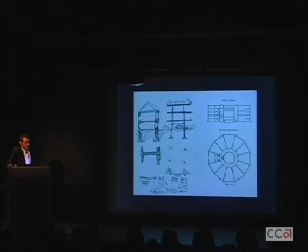But the theory that I would like to propose, and that later on I will illustrate extensively with the projects of the office, is that if in the past the architects who were addressing some sort of political projects were relying primarily on the section and the plan as the architectural devices that establish contiguities, adjacencies, hierarchies, and so on in the society that the building is hosting, in the near future the envelope is going to become even more important than these elements in terms of acting as a political agent.

Why is that? These are two images that represent a theory posed already, I think it was '89, by David Harvey, of what constitutes the culture of global capital or late capital, the infrastructure of global capital and late capital. He was very important at the beginning of our practice, because his theory was that late capitalism is enabled by what he calls mechanisms of spatial displacement, infrastructure, telecommunications, and mechanisms of temporal displacement, which is primarily credit.

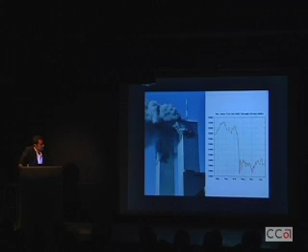And so this is the picture that we were working on almost as a generation 15 years ago. For example, Yokohama is very much a product of trying to embody that idea that we live in a borderless world, that we can move anywhere in that continuous space, and that reality is kind of liquid and fluid and dynamic. And what we see today is that the mechanisms of spatial displacement are used to bomb cities, and the mechanisms of temporal displacement have dramatically collapsed on a global level, with the effect that borders and limits are reappearing everywhere with an unusual virulence.

This is the American Embassy in London, for example. See what kind of borders buildings are required to have these days. There is increasing talk about protectionism everywhere in the world. So you can see that actually that idea, that utopia that maybe we grew up in, that reality was borderless and fluid and so on and so forth, is actually not so.

And what we probably have to face is that what we need to do is to re-engage in a reformulation of borders generally. So borders are no longer the borders that we used to know as borders, but they need to be redefined in an entirely different way. And that is basically one of the first reasons why I believe the building envelope is now a crucial element in terms of political agency.

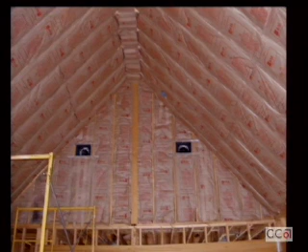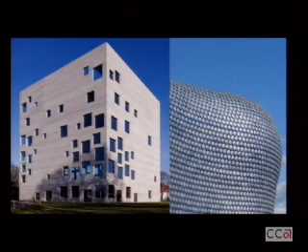Then there are other reasons why this element is important. Climate change. The building envelope regulates or can control basically 70–80% of the energy that a building consumes, and therefore it becomes a crucial decision in terms of how the building performs. The building envelope has also undergone in the last few decades a process of technical development that now makes the technology that builds roofs and the technology that builds walls very similar.

So where just a few decades ago you would use entirely different technologies for these two elements of the envelope, now you see that curtain wall technology or light metal cladding technology is increasingly used for the walls and the roofs, and so perhaps we need to start theorizing and rationalizing this element as a whole envelope rather than as a facade and a roof, or a facade and a silhouette, which is maybe the way in which it has been theorized in the past, and hopefully bring together the representational elements and the technical elements that regulate this homeostatic membrane between inside and outside of the buildings to make a more general theory of the building envelope.

So as a kind of structure of that theory, and I will be using this classification to categorize the projects from the office that I will show later, my proposal is that there are 4 basic types of building envelopes, and depending on each one of these types, which are basically aspect ratios between dimensions of the envelope, they enable, or they are more prone to engage on, certain types of concrete matters with political significance.

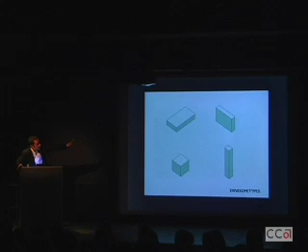And maybe I should say also the whole theory of the envelope is an attempt to escape from the research on the pure surface, on the pure treatment of the skin, and start to draw relationships between the constitution of that skin and the wider problem of shaping the envelope of the building. So some skins are more adequate for certain types of envelopes, and so on. And so there are these 4 types, which I call flat horizontal, flat vertical, spherical, and vertical.

So I'm now going to move quickly to explain each one of them, and the main possibilities that are predominant in each one of those types, using our own work as an example, because I think that perhaps they are not the best example of what we can do with these different types of enveloping structures today. I've discovered the subject by actually looking at the projects that were going on in the office, and I think as such they should be seen, not as examples of best practice in this future theory of the building envelope.

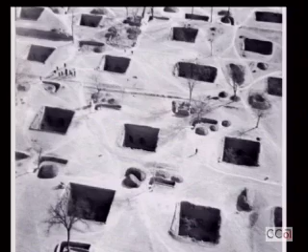So what is called flat horizontal, you all know what kind of buildings they are. They have a long history in architecture. They are sometimes also treated as a kind of utopian dream. But what I think makes them interesting as possible political or socially transformational devices, as devices that we can use to transform reality, is that they usually cover a large surface with a constant section which usually hosts movement of goods and exchange in a certain location, and that is a type of activity that is obviously central to the formation of communities.

At the same time, these types of envelopes are usually so large that they require certain ways of bringing daylight in and bringing natural ventilation in, and they are so large that very often they swallow pieces of nature. It's not uncommon to see how people who design airports or shopping centers, which are some of the examples of these typologies, tend to replicate nature in a very picturesque way inside of those buildings.

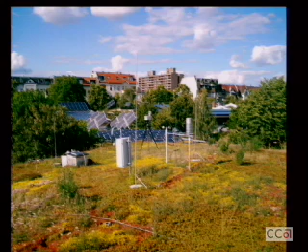So I think if these types of envelopes are first envelopes that probably contain important functions of social exchange and financial economical exchange in societies, they also have the function to articulate often the natural and the artificial, both on a representational level, but also on a very direct, pragmatic level, as I was explaining before, by allowing daylight and ventilation to be in or not inside of the building, by making a kind of sealed envelope or a transparent envelope.

And they also have, as you can see, a kind of increasing amount of green roofs growing everywhere. So these envelopes, I think, address perhaps another possible political subject, which is the ground. They can challenge or they can reconstitute the ground, because they are so large that if treated appropriately, they could probably act as a challenge to the natural ground.

The other feature of this type of envelope occurs on the peripheral surface. These buildings are usually focused on the inside of the building, and there is very little function environmentally, because the edge of the building compared to the total amount of surface is very small, so you can basically have anything there, even not insulated, and you will not substantially affect the performance of the building. But there is also not a lot of relationship between the inside and the outside.

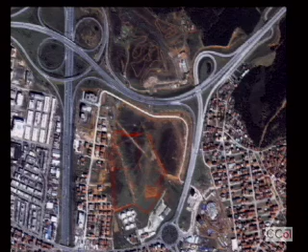So two projects that address these two surfaces, the top surface and the edge surface. This one we concluded a few years ago in Istanbul, on the Asian side, in this place in the middle of a highway interchange, and right next to this, which is basically the paradigm of the flat horizontal envelope: a blank box, sealed, not transparent to the outside, detaching the consumers from the non-consumers, detaching the inside from the outside, detaching the natural from the artificial.

So how all these different categories are treated by these types of envelopes are, I believe, quite profound political actions. So the approach that we took when doing this project was to challenge that type of envelope. One of the interesting things was that the earth was clay, was red, literally. Istanbul is a green and red city, so we thought that rather than using the blue and the yellow of IKEA, we were going to do the opposite. We were going to merge with the camouflage, with the palette of materials that is local to Istanbul.

We miraculously convinced the client to explode the box. There you see our building next to IKEA, to put the parking underground in order to lose that reference to the surface of asphalt that is customary in this type of development, and even to suggest the possibility that at some point the envelope breaks and maybe initiates surrounding fabric rather than remaining as a kind of isolated object in the urban field.

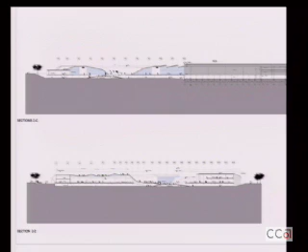So I'm not going to describe it in great detail. There are some of the first iterations of the project, where we were trying to activate also the roof, as I was saying before, as a device that will, as opposed to IKEA, bring daylight and natural ventilation inside of the spaces, but also as a device that can be used as a new park, as a new ground, and relates in different ways to the edges of the complex. So there you see the section of IKEA and the section of our building and what it does.

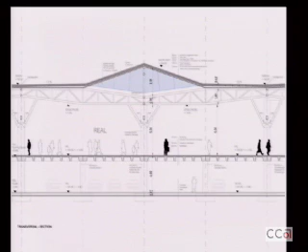I'm not going to explain the building. It's a very large building. Just to show you a few images of how the building is built with this very reductive palette of green and clay, and how the roofs become almost like a new park, and also how that new park challenges the definition of the horizontal, the ground. So by becoming closer to the ground, you are more able to challenge it as a cultural element. Not going to delve into any of these.

The issue of relating the natural and the artificial: the use of the skylights for natural ventilation and daylight inside of the building is also used as the device that generates the topography on top of the building, and this is how people use the areas on the building and the ground. I mean, these guys don't know it, but they are on unstable grounds.

Second project is a project that we are developing now in Birmingham, in the center of England, and this is a project that actually could be one of these non-profit projects that represent society, but the way it was given to us was absolutely perverse in the sense that the real project, which is the redevelopment of the station, is given to a corporate company that is doing it, and we are giving about 5% of the total budget to wrap the building and make it look good.

And also because it's a shopping center, it's a station and a shopping center, we cannot challenge the edge of the building. So again, we are in a situation in which there is nothing. I mean, the usual thing that envelopes used to exploit as a representative task, which was transparency, is impossible.

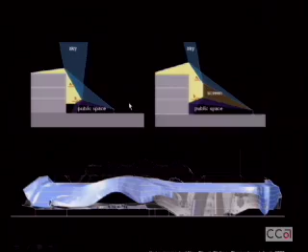So we produced this device, which rather than trying to make transparency, acts by reflecting the field, the urban field surrounding the building, and so we shape those reflective surfaces in such a way that they will always reflect the sky or the public space and not the buildings in front, because Birmingham is a really ugly city.

So we made a number of sections. You see the blue things are the halls where the trains are located, and you see that every one of these sections has different distances between where the public is located, because sometimes you are looking at the station from beyond the hall in front of the station. Sometimes you are next to it. And so these conditions of reflection change from one section to the next. Sometimes it becomes very complex. Sometimes it encloses or embeds the screens.

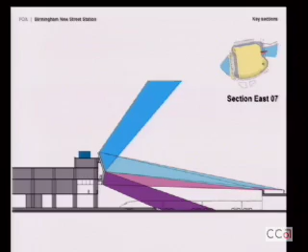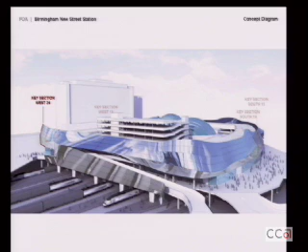So what we did was to define those few crucial sections, and by morphing them, we generate the skin that will represent, if you want, the building in the future. And so that is how that surface that reflects those elements will be generated and will perform in the future.

It's a kind of rain screen that is supposed to capture also the changes in light that occur in the center of Birmingham through the day, capturing the different solar conditions, but also artificial lighting, etc. So these are some of the images of this project as we imagine it will be. It is starting construction now.

And there is another animation here where you can see this idea of a kind of Koyaanisqatsi type of fresco, where you have the clouds reflecting and the trains moving and all these kinds of things inside. Unfortunately, you cannot see it, but you can imagine.

So the second category is the spherical category. Spherical doesn't mean necessarily spherical. It means that it is a category of envelope where the three dimensions are more or less similar. I call it spherical in honor of Sloterdijk, who is one of the people who inspired this research.

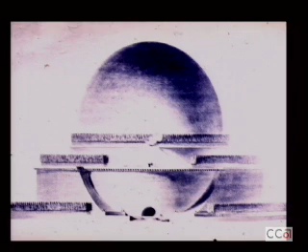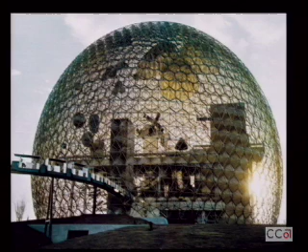So these are, for example, contemporary spherical buildings following my own theory. Sometimes they are not spherical geometrically at all, but you see that they have more or less the same dimensions in every direction. This is a typology that has been used often as a kind of ideal visionary typology, I think primarily because it doesn't really work unless you have massive air conditioning, because the relationship between the inside and outside is very tenuous.

And that's precisely what is interesting about this typology, and what possibly generates its potential in terms of representing or embedding a certain type of culture and possibly transforming it: this is the typology that, just in virtue of its geometrical qualities, has the lowest envelope ratio of all. If you divide the square meters of the envelope by the cubic meters contained inside, this typology is always lower than any of the other ones.

So what does this mean? It means that the skin is much more independent from what happens inside than in most other typologies, probably with the exception of the vertical side of the previous type, where that kind of relationship is very tenuous. But also, because of the nature of these envelopes, normally they are public buildings. They are buildings that have a variety of functions.

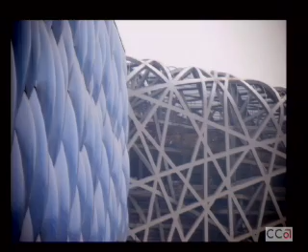It's a typology that enables architects a great deal of freedom in terms of surfacial experimentation. So you see architects delving into all kinds of experiments that have nothing to do with the functioning of the building, but primarily with communicating the organization to the outside. In many of these experiments architects are exploring tessellations or technologies that probably weren't affordable 20 years ago, like silk screening, layering the functions of the surface in entirely new ways, using CNC technology to produce these tessellations and so on.

So what you see in all these examples is some sort of latent desire of architects, and probably of the societies where they work, of producing organizations that are consistent and yet differentiated. My favorite case is the Olympic buildings in China. You can see that invariably, no matter which architect works, it ends up with the same recipe for the envelope, a pattern that has a differentiated nature.

And think what that means in terms of political message. We are still able to do big projects. We are still one, but as opposed to the Mao years, where there was the same suit for everybody, we are becoming sensitive to differences, to individuals, and so on.

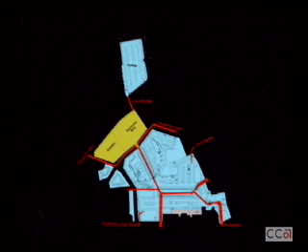We basically were given this plan. We were able to kink the surface a little bit, but not very much, because they already had outline planning permission, and we were told to simply make these two functions there. We did design the structure and everything, but it's irrelevant what happens. It's correctly done by the office, but the brief of the project is so constrained that there is not much you can do inside of there.

And in fact, this is another one of the reasons why I'm interested in envelopes, because I identified it as probably the last domain where architects have some power. In all the other areas, you get retail experts and cinema experts and housing experts and so on, and they know exactly what to do. So there are very limited possibilities of operating with the plan and the section as architects in the past did in order to transform reality, and we are now constrained to the skin.

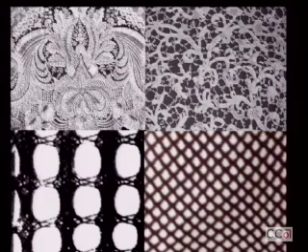So in this case, there is John Lewis, which is a kind of generic British department store, and an American cinema operator who have to occupy the building. But what we wanted to do was to relate the skin to some of the historical contents of the city of Leicester, as one of the important cities where there was textile industry in the 19th century. John Lewis is also a company that has a long tradition of hosiery and lace. So in a way, we turned that into the message that the skin was going to convey.

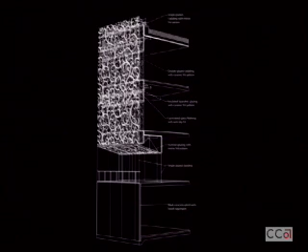And so we managed to convince the client to do this kind of very expensive skin. It's a cheap project, but in this case it turned out to be expensive: two layers of silkscreen glass with a drawing that was selected for its geometrical qualities of coverage, and later on you will see geometry out of the archives of John Lewis. And then we redrew it in order to make a number of tiles.

It is 8 tiles that by mirroring them would enable us to give consistency to the whole building, as opposed to what happens normally with these buildings, which are blank envelopes where the architects are usually forced to make a kind of collage, like you paint this blue and this gray and this yellow, and the whole thing looks a little bit like the scale of a city. Here it was almost the reverse of that. We turned everything into a single floating lace box.

And then we differentiated in order to provide areas of higher and lower transparency, both for the visual relationship between inside and outside, but also in terms of shading the envelope from the sun. So you see, the pattern is manipulated, and by this manipulation we can provide more or less density, and it is shaped to kind of embrace the heads of the people inside.

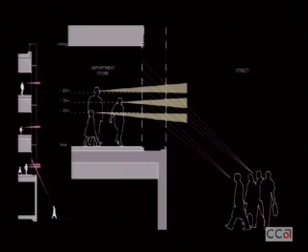And this looks silly, but it is not, because when you look from inside, you see through at the height of your head, because there is no overlap of the two patterns. But when you look from outside, the two patterns overlap, so the view is obstructed. This is how this facade works. So in a way, here the pattern challenges the unitized system of the facade with this silkscreen lace that can adjust to different densities.

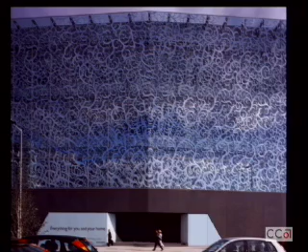And so these are some photographs of that envelope that, because it's mirror fit, sometimes picks up the neighbor, sometimes reflects the sky, sometimes becomes more opaque depending on whether the sun is hitting it or not, and at night produces these sorts of lace effects, as if it was a kind of Chinese lantern that changes color.

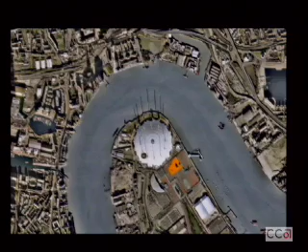Second project on this category of spherical is a project that is now under construction in Greenwich, in front of the dome, in that orange area, and it's a building that looks like this. It's a School of Design and Communication, and it's a building that is located in front of the dome, and it has to adjust to a kind of crescent-like urban regulations surrounding the dome, which we turn into kind of kinked, jagged form that works better with the function of the school to happen inside.

But I think what is interesting in terms of this discussion is that because of that position right in front of the dome, which is a massive blank object in the field, we started thinking from the very beginning in the possibility of doing something that almost doesn't look like a building. It looks also like some sort of container, and being the school part of the arts and crafts tradition, we thought that maybe a possible idea would be to use wallpaper as an envelope, kind of these floral wallpapers of William Morris.

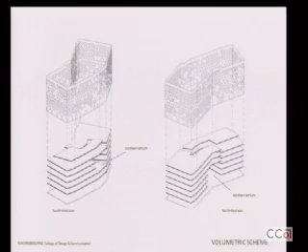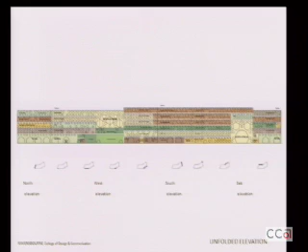And again, this latent desire of all contemporary architects of differentiating buildings. In this case, the pattern of fenestration is differentiated following the different functions inside of the building. This is an unfolding of the functions attached to the facade. So you see also that as a challenge to the conventional type of spherical envelope. In this case, what we are doing is to try to reconnect the inside and the outside, to use this membrane not as something that is a kind of free floating representation, but on the contrary is something deeper that relates to the programs and to other issues you will see later on.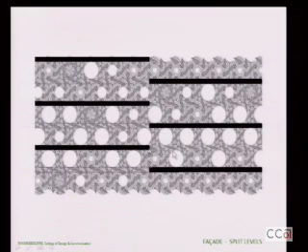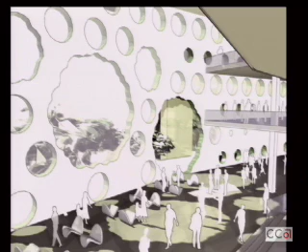So this is the system. It's a split level system that produces a double fenestration inside of the studios. It is very much like an architecture school, except there is not a lot of architecture, but similar things. So these two levels of windows are able to change in order to provide the flexibility of having different types of perforation of the envelope. You see, when the windows become larger, they become also corrugated. You will see later on why.

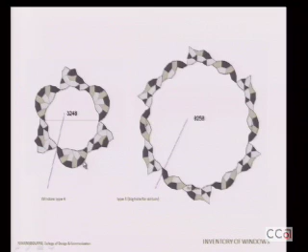Because of this. These are the floral tiles, the floral petals in the wallpaper, but instead of replicating nature, they are made with this non-periodic, non-regular tessellation invented by a British mathematician called Roger Penrose, that allows us to cover the field just by using these different tiles. And so you see how they produce the system of windows that make the building, and why, when this becomes larger, the edge of these roses becomes dictated by the tessellation system of the envelope.

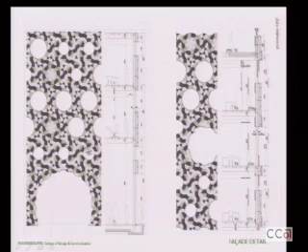And you see what they do in section, and what is interesting, I think, about the system is how it links the ornamental quality of the skin with the function, which is dictated basically by the size of the window and by the position of the section. You see the section always including two sets of windows, but when the window size changes, the pattern changes. So the pattern is different around here, and this occurs automatically when we color code every one of the tiles in respect to the polar center of this polar array, these roses around every one of the windows. So this is what happens. You see how the pattern changes as the window size changes. And this is a one-to-one mock-up to test the facade.

Next category. Are we already running late? Very late? We're okay? Okay, sort of okay. Okay, if it becomes really embarrassing, let me know.

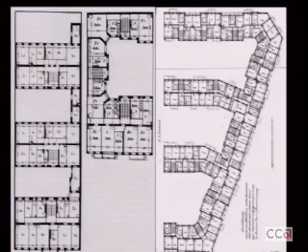So flat vertical typology is, you all know this type of buildings. They are buildings where there are two dimensions, one of them vertical, that are much larger than the other one. The city, basically after the Enlightenment, the fabric of the city is built with this typology, which replicates and optimizes depth of space for whatever functions are required, and the repetition of that and the configuration of that band of contained space is what forms the fabric of the city.

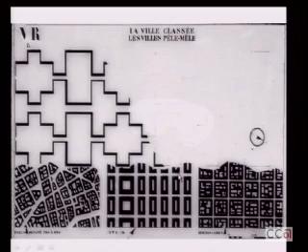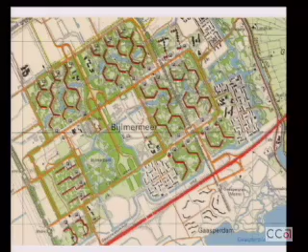You see the blocks suddenly have no front, no back. The public open space has occupied the whole ground of the city. I mean, some of these things in Bijlmermeer are doing the same thing, as opposed to those older examples of, for example, Barcelona or Turin, where the block is actually dividing the public space from the private open space.

So I think that this is, first of all, one of the most powerful things we can do when deploying this typology, which is to consider how it relates to the space of the city. But this typology also has another very interesting potential in terms of transforming the society that inhabits it, which is that, as opposed to what was happening in the previous typology, where the skin is basically independent,

in this typology, the figuration of the building and the environmental performance coincide or collide in that superficial envelope. So as opposed to the previous ones, here that is a very active skin that regulates the climatic exchanges, and at the same time it is also what makes the face of the community, and sometimes represents very directly what that face does, sometimes insisting on the independence between the cells of the individuals that compose the building, sometimes insisting on the industry, on the system that produces those envelopes.

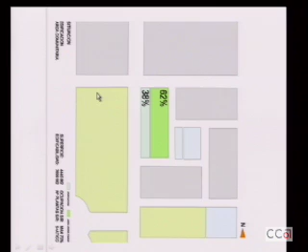This is very cheap social housing, where we were given a site and we decided to concentrate all the FAR on one side of the site, so that every unit will have a view of a private garden and a public garden on the other side that existed there. So in order to do that, and we had a height limit, we needed to resort to a very deep space, and that gave us the idea that maybe because we have a very low facade ratio, we can try to produce social housing made out of glass.

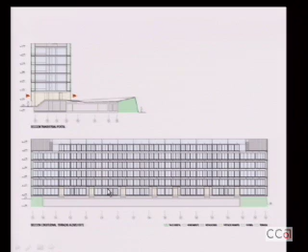But then realizing that we were in Madrid, and that the building is oriented north-south, so these are east and west facades, we needed to introduce some kind of solar shading device that then became that double skin, which produces terraces for every unit and acts as a kind of climatic buffer. You also see that the units have double aspect, so that enhances cross ventilation, etc. So these are the units. We are not going to look at them.

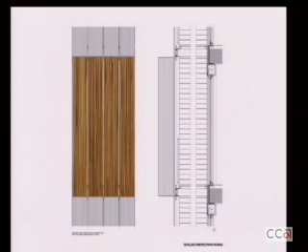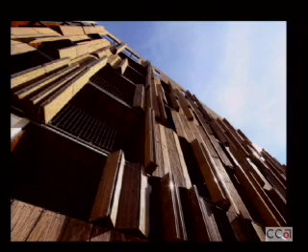In this case, everything is consistent, everything is regular, and yet the fact that people move the louvers differentially to accommodate their desires produces that changing and differentiated picture of collective desire on the facade that is not just a picture, is not just a collage, but is produced by actually having some kind of environmental performance. Well, these are simply these terraces wrapped in bamboo when they are open, when they are closed.

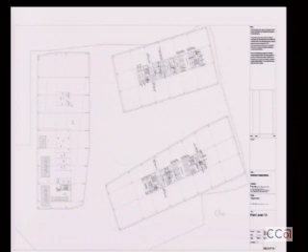So what is interesting about what we did here with the envelope, these are some of the plans. You see, it's relatively conventional inside. There is nothing we can do there. It's a commercial project. We cannot change it, but we can play with those deformations of the skin in order to produce the architectural expression of the project. But not more than that.

This architectural expression, because it's crystalline, had to be glass, but glass is now a material that is not quite sustainable. So we needed to think about some sort of solar shading device. So we asked, there is one slide missing, but we asked Arup to measure how the sun will hit the different faces of these faceted surfaces. And so they gave us areas that had more solar exposure because they were tilted, for example, towards the sky, and some areas that were to the north didn't really need much protection from solar exposure.

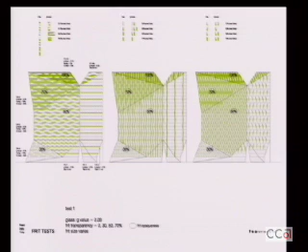So what we did was to devise, in this case, three systems of tiles that are fritted following a pattern, but there is only a discrete number of them that produce, again, that picture of differentiation, linking the expression of the building, the expression of differentiation in this case, which is this kind of political unconscious desire, with an environmental performance of the skin. And so those are those buildings, and this is how the skin would be patterned differentially by this system.

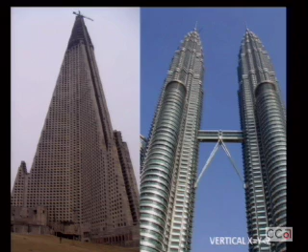Okay, last category, if I may, vertical. I think what is interesting about this category is that the friction between the environmental performances of the skin and the representation of the iconographic performance of the building is at the maximum. So these buildings have the most dominant presence in the urban skyline, but at the same time those skins are the most expensive, the ones that have to perform best because they are very exposed.

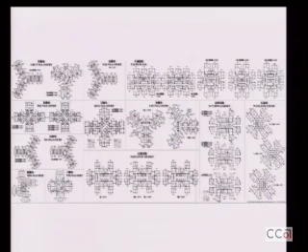So you see the complexity of folding the envelope in order to obtain certain facade ratios that, for example, allow for natural ventilation or daylight to every room in the building, as opposed to this, which is Dubai, where you see that nobody wants to connect to the outside. Nobody cares about natural ventilation. Nobody cares about daylight. Everything is artificial inside, and that's why the skin is suddenly much less articulated, because the relationship between outside and inside doesn't matter.

So this type of relationship is where I think maybe lies the most relevant research to be done with this typology in the future, which is how to move from the paradigmatic prototypical image of the tower to a vertical envelope that actually relates to all these climatic performances. The tower by nature is one of the building types that is most exposed to the sun and to the wind, and that also casts shadows on the surrounding field. So I think there are many arguments that we can use to produce a kind of anisotropic

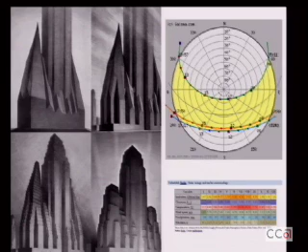typology of towers. This is some of the research that we've done in the office, where you can see that the facade ratios in the UK and the facade ratios in Malaysia or Hong Kong are substantially different. So again, that gives you an indication of the relationship between the skin and the space contained inside the building, and how that produces an entirely different expression of the building. Look at how these buildings work, and look at how these more Western type buildings work. I think there are cultural reasons for this differentiation.

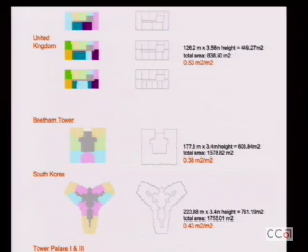Obviously, in Hong Kong, the climate is perhaps more humid, but I think that the main reason for these differences between some towers and other towers is cultural. In Southeast Asia, people living in high-rise buildings are still not accepting that they are living in an artificial environment, and so they shape them to obtain the same domestic environments that we can see in low-rise buildings. So, things that one can mobilize when playing with vertical envelopes. One of them is the structure.

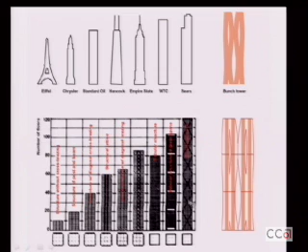This is a diagram from our proposal for Ground Zero for Max Protetch, which was a kind of utopian proposal where we were trying to propose the building as one more step in the evolution of high-rise typologies. So we shaped the envelope trying to mobilize this kind of diagonal nature of lateral forces in the building.

So, which basically produce also internal effects, but also related to other representational contents. I mean, all these images are also part of that idea of making the envelope representing certain, conveying certain messages. So you probably have seen that there is a kind of thread through all these examples in which the representational becomes reattached to the functional, as opposed to being more independent.

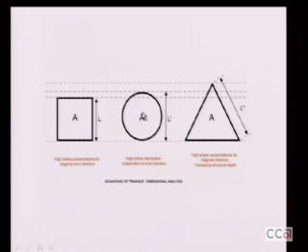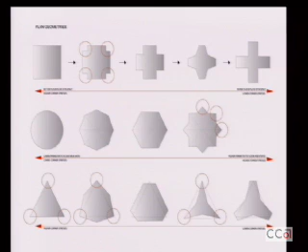So more research related to the structure has to do with how the envelope acts structurally, and the surprise of discovering that actually the mass of the building, the geometry of the footprint, has decisive effects in the performance. This is the same area, and this works much better than the other two, for example. This type of experiments is also some of the research that we are doing that relates to the vertical envelope.

This is part of the research that I've been developing in Princeton, and that relates to all these subjects. It is a proposal for an atlas of ideal footprints, high-rise footprints, and is something that we developed by looking at climate data and looking at solar exposure of different types of envelopes, and by using programs to play with different types of plans.

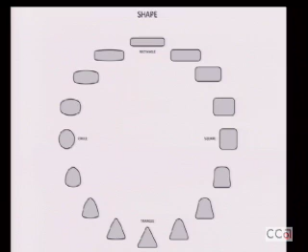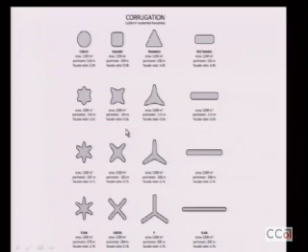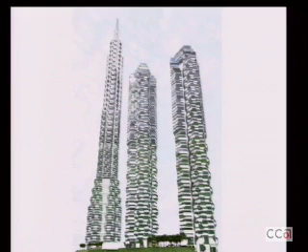It's a kind of megalomaniac project, but I think quite interesting, as a kind of critique of the star architecture of high rises, doing whatever whoever wants to do at a certain time. Three very quickly, three examples, and I finish with this, of how we in the office have used these climatic ideas in the design of high rises.

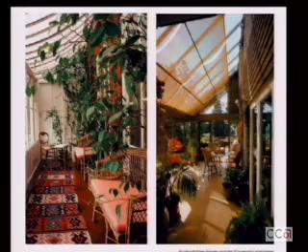These two towers are now under construction in Busan, in South Korea. They're residential high rises, where you can see that idea of corrugation being explored not only in plan but also in section, by trying to introduce these kind of spaces as conservatory spaces on the section of the building.

And what is maybe more interesting for our discussion of this building is to see that in Korea, again, the relationship between the form of the building and the cultural performance of the building is remarkable, because in Korea there is some sort of cultural worship of the sun that means that if this is an apartment that is north facing, it will cost half of this apartment which is south facing. To that degree of difference between south facing and north facing apartments.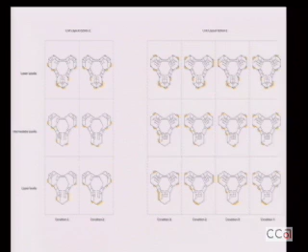And so you see that immediately the tower becomes anisotropic, becomes oriented. In a cube, you have only one south facing, two that are east-west, and one that is north, depending on the orientation, but obviously a form like this, if properly oriented, a triangular form, provides much better performance in terms of solar orientation, and this is how the skin is then corrugated alternatively to produce these glass house conservatories on the skin of the building.

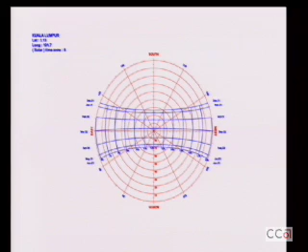Second project is in Kuala Lumpur. Kuala Lumpur is a city that is nearly on the equator, where we have been also commissioned two residential towers exactly of the same height as the other ones. But you see that in this case, the towers are elongated and ideally oriented east-west, because that means that the narrowest facades are the ones that are exposed to the sun. In Kuala Lumpur, you don't want to be exposed to the sun.

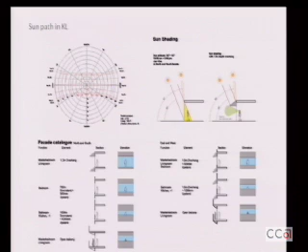And on top of that, we also explored as an expressive trait of this envelope things like this, which are part of the local language of architecture, trying to protect from the sun. So we make a menu of canopies protecting the facade from the sun, depending on the rooms inside, and this is basically the expression of these differences of orientation and function on the facade of the building.

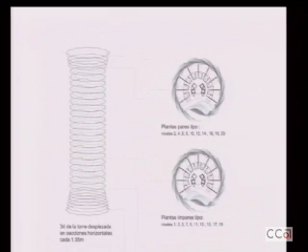And the last one is a hotel that we designed and is also on hold, in a northern location in Spain, where what is interesting is that the sun is also important, culturally speaking, but in this case the views are to the sea. So you have a condition of views and sun, not like in Korea where it was coincident, but in opposed directions, and so that leads us to use a round plan with a number of corrugations that I'm not going to explain very much.

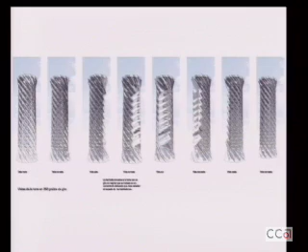I just wanted to show you how the basic form of the building is actually dependent on climatic conditions, views, and also cultural preferences. This is a kind of derivation of this project in Seoul, actually, where we have the same problem of views to the river in one direction and sun coming from the other direction. So there are different iterations of these circular plans.

And this is the last project. I had some other things, but I think I've already exhausted the time. So there is no conclusion to this. It's kind of a sudden death lecture, because there really is no conclusion. It is a kind of ongoing research. And hopefully in a couple of years' time, I'm targeting to make a manual of the contemporary building envelope, and then I can come again and tell you what the results are. Thank you very much for your attention.

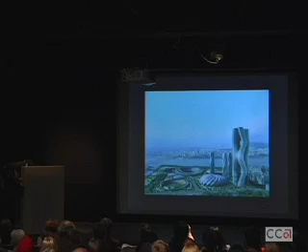You talked about architecture and architects being agents for political change and taking a more active role than some other people in your generation have. I was wondering if you could talk a little bit more explicitly about how your practice has been engaged with that in some of these recent projects.

Well, I think that we engage with that on a very basic level. I'm not going to claim that systematically in all these projects we put the political as the main performance of the project, because as I said at the very beginning, perhaps these are more indexes rather than examples of what we should do, and I think it would also be very naive and difficult to pretend that we are making very important political transformations by doing these projects. But I believe we are in some of them targeting or managing to address some of these issues.

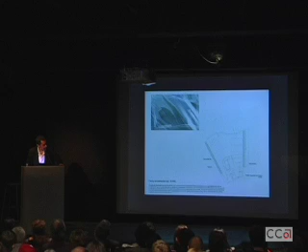For example, when I was showing the Kuala Lumpur project, another one of the things that we did in that project was to exploit the section of the project. You see that the pattern changes from one place to another. It has different patterns depending on the region of the building, and that is because it is reflecting this diagram. I mean, you see the section, this diagram.

So, by definition, we are supposed to locate different types within the towers, and in this case, that is what we try to mobilize in order to produce those different possibilities within the building, and to express them, rather than having a constant envelope with always the same terrace.

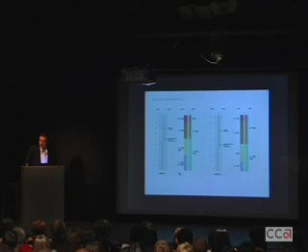Of course, you can also say this is not very politically correct because you see the biggest penthouses at the top, 5 plus 1 bedrooms, and as you go down, they are the cheaper range of apartments. This is something that probably, if we had real power, we could challenge. At the moment, obviously, you will be fired immediately if you propose it. So we choose to be pliant and yet try to express that differentiation in the section of the building.

So you see that the tower is not straight, but it has these slight movements that play with the corrugation as a kind of expression of difference. But it's very difficult to challenge some of the structures that you get with these commissions.

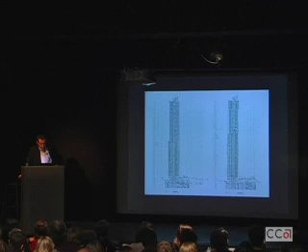There is still a function, and it's still something that is somehow at the back of our minds. But let's say you don't have time to get a diagram and develop it and complexify it and extract an architectural expression out of it. It's not that these drawings have no diagrams. I'll show you one, for example, that shows the distribution of space in the section of the tower and how it becomes embedded in the form.

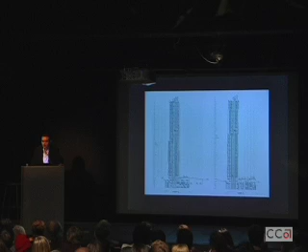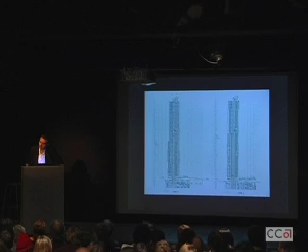But the research becomes much more immediate, much more about understanding the problem, producing more or less a certain organization, and then mainly concentrating on the resolution of the geometries of those envelopes. So it is something that is not as much part of the work that we are doing now as in the origins, not because I think it is irrelevant, but because we've moved to a different operation, where the diagram is perhaps less effective.